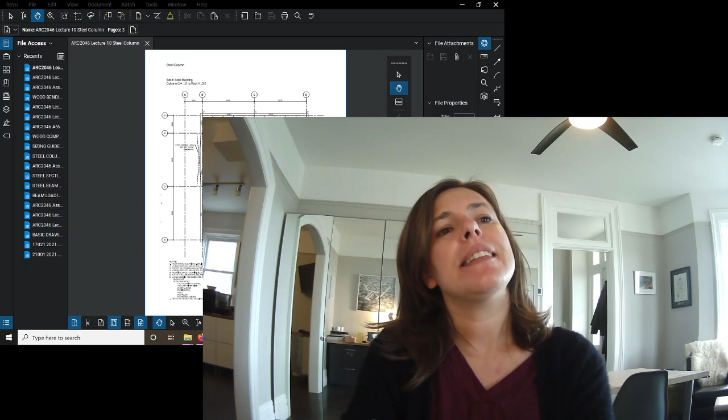So here we are, week 10. I'm going to go through a series of examples. I'll tell you, when I started planning this lecture out 2 days ago, I thought no big deal - I'll make up an example of each, a beam and column for wood, steel, and concrete.

I haven't done this lecture before. Up until 2 years ago, Structures 1 and Structures 2 were each only 10 3-hour lectures. In fact, when I started, they were 10 2.5-hour lectures. So the time has grown. And in the past, there's always been at least something that has made us miss a class.

So last year, COVID, there was a week it was just impossible to make things happen. The year before, I had strep throat for the 7th time in 6 months. And then the year before was when you got hit by the car, Dave, and I was pregnant and still had an 18-month-old.

So there's always been a reason one lecture has fallen off and we've only had 11. So one good thing about doing the asynchronous stuff is I have no excuses - I have to get all 12 done. There's no way we couldn't get another room, or they wouldn't give us the extension. Even though there's time you could extend, they would never give it to me.

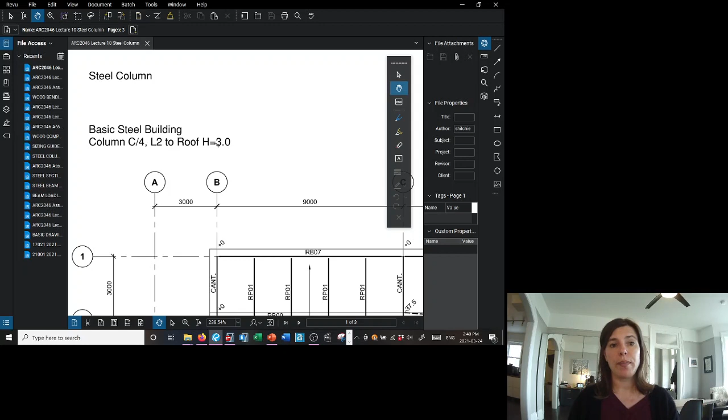So let's take a look here. We've got our steel column. This was our basic steel building, and we're going to look at column C4 from level 2 to roof. If you look at that full drawing set, you'll see the difference between level 2 and roof is 3 meters. So I'm only showing the roof here, but you could open that drawing set and see what that difference is. I think you guys can see this - it's not as great as I'd like, but it's a little bit bigger than a little dot.

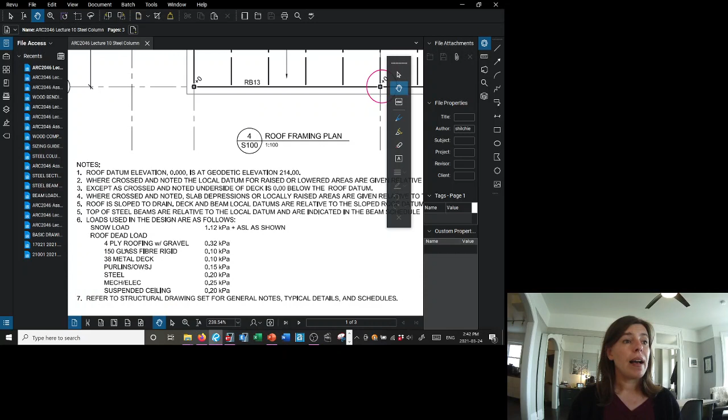If you remember, there's a column schedule listed with this as well. We have loads here, there's a snow load - they've already worked it out from SS and SR and showed us 1.12 kPa plus ASL as shown. There was no ASL shown, so it's 1.12. Then here's the dead loads. So everything we need to design this, we have.

Let's go to our next page here. If we were following our sizing guidelines, we'd take that height and divide it by our sizing guideline for steel columns - 3 meters divided by 20 tells us 150 millimeters. So for a preliminary drawing set, we'd probably want to draw an HSS that's 152 by 152 to leave us a buffer.

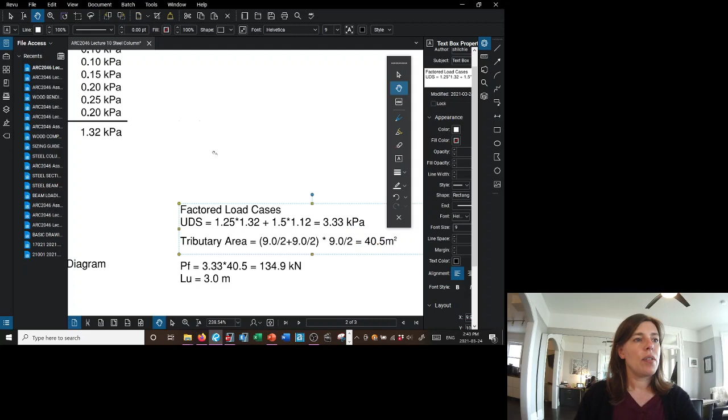Now, from what we learned in Structures 1, we know we can take these loads and figure out the UDS, which is the factored dead load and the factored snow load. We can look at our tributary area, which was roughly 1/4 of each of those bays. So we have a factored load of 3.33 kPa and a tributary area of 40.5 meters squared. Remember, I ignored the fact that the stairwell was there, so don't worry about that - I'm going with 1/4 of each of the bays. I can multiply my load times my area, and I get a factored load of 134.9 kilonewtons.

I know I have an unbraced length on my column of 3 meters, so it's always nice to draw yourself a little picture. Here's my free body diagram of my column. I've got PF, which the value is listed right here. I've got my dimensions, and I've got the reactions that make this stable. That is everything we learned in Structures 1. It seems a little sad when it's written down so quickly, doesn't it?

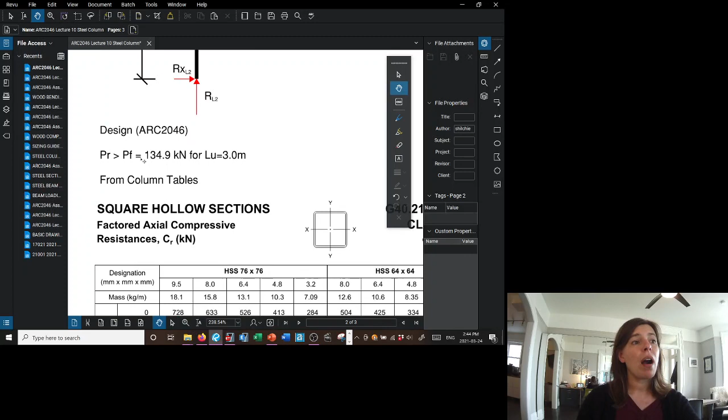Now we can look at what we've learned in Structures 2, which is actually designing it. We know if we have a table, we might as well use it - you guys have to do full calculations on the exam, we don't have to. But what we want is PR greater than PF. We know what PF is for this unbraced length, we've calculated it. If we look through all of the available options, we're going to go with a square HSS. No one's told us that, but let's just stick to a square HSS.

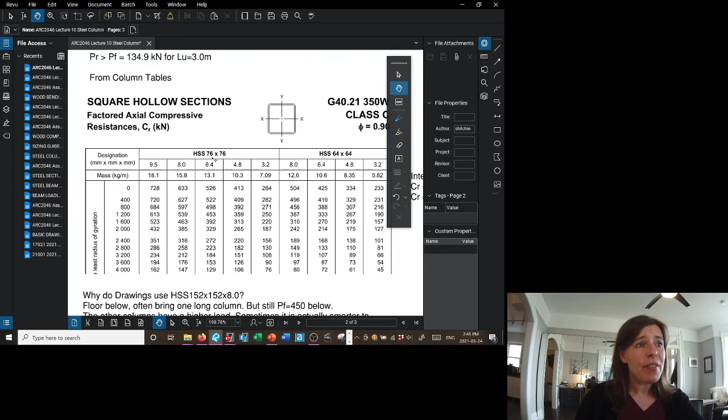We have an HSS 76 by 76, and all of these columns list at 2.8 meters and 3.2. We're at 3 exactly, so we want something that falls in between. It looks like we might not be able to work with a 3.2 wall thickness because we have basically 135. But an HSS 76 by 76 by 4.8 would fall in between 151 and 182 for our CR, and we want CR to be greater than PF. So we can interpolate here as a straight line value between these two things, for a 76 by 76 by 4.8 HSS, and we get that CR is 166.5 kilonewtons - that looks like it's greater than our PF.

Now I wonder - let me open these up right here. We're talking about column C4, right? So here's column C4, I have 150 kilonewtons written down here from level 2 to roof. Sometimes we'll just round up to something even, having a little buffer in there, no big deal.

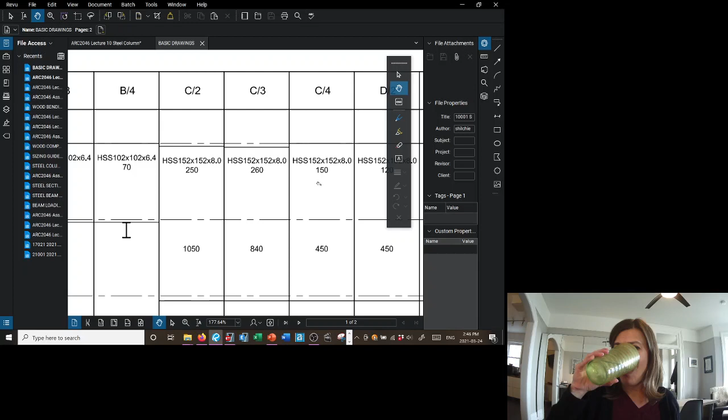We know that if it's critical, we can go back and refine it, and maybe that 135 kilonewtons gets us the exact column we want. But look, I have a 152 by 152 by 8. Why would I do that? A 76 by 76 by 4.8 works, and it worked comfortably. Why would I make a bigger member? Why would I do that?

Well, there's two reasons. Part one is that we have a second part to this column down here. Below, we have 450 kilonewtons on this. So you might still say, who cares? Make this part be a 152 by 152 by 8, but not this.

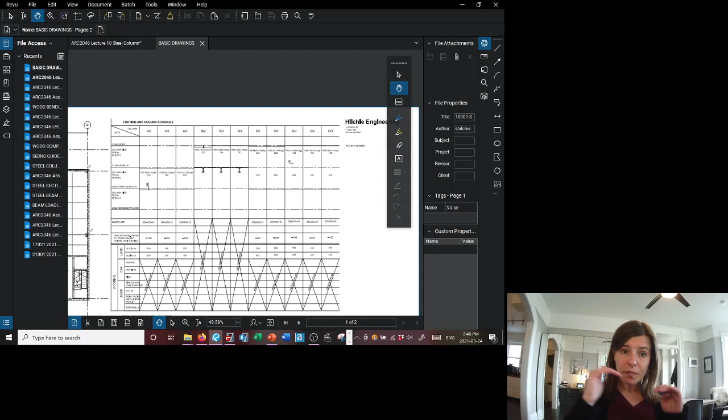I get it, this would be very annoying to you, but this is where understanding construction can actually come into play. Designing or structural analysis isn't the only component. We're going to go through the calculation for the 76 by 76 by 4.8 thoroughly, but the reason that's not what's on my drawings is because most of the time columns will come in at least a 2-story lift. Piece count can be a big part of cost, and sometimes they don't like to build one floor and then come back and put more columns on. Columns they might put in place and have them go more than 1 story, build in the second floor, and then put on the roof.

Not always, but for something like this, for 2 stories, they probably would do this. So I know that inevitably the contractor's going to come back and want to do that, so I'm just going to go with that. I know this is going to make it cheaper, it's going to make it easier for them to build, and that is part of my job as well. As much as I say size or cost is the be-all and end-all, and that's usually directly related to the weight, it's not the only thing. Ease of construction and piece count can come into play.

Oh my goodness, sorry guys. I've got an eyelash in my eye. I know, I got it. Oh, now I'm probably going to sneeze.

So in this case, I made a judgment call, and also we have 152 by 152 in most of the locations. Sometimes just having a standardized column can make things easier as well. So some of this is experience.

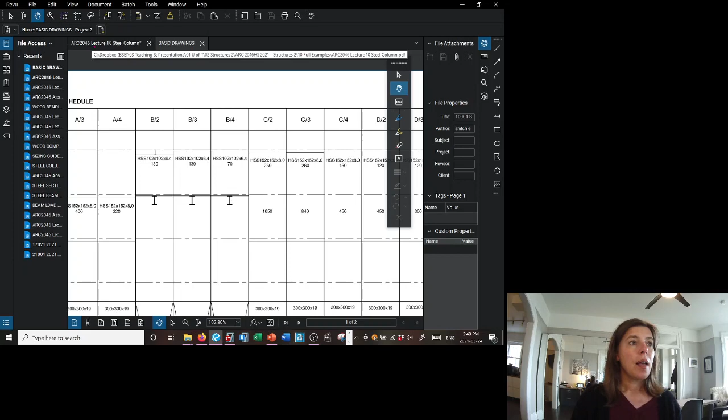But we're going to now do the calculations for the 76 by 76 by 4.8, just because that's the size, we want to verify that. So we're going to go through and do that calculation. I need to stop this, I can't get it out of my eye. Sorry about that, I think I've gotten it out of my eye now.

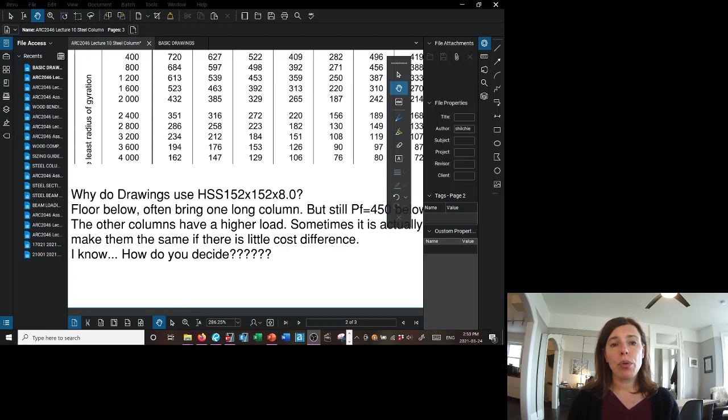Okay, so I get it. How do you decide? Well, that would be my job to help inform you of that as the architect, with me being the engineer. So we're going to go through and design the one that we just sized. Let's go to the third page where we go through the calculations for an HSS 76 by 76 by 4.8, that is 3 meters long.

We know everything we need to know about steel. We know the reduction factor for a steel column. We know that cold rolled steel is 350 MPa. We know E is 200,000 MPa and G is 77,000 MPa. We know that we can find the member properties. We can open the steel sections.

Eventually... that's weird, right, that it isn't showing up, right team? What's happening here? There we are. So we can go to the page that has the 76 by 76 by 4.8 on it. On that page, we can look up area, we can look up I. Now, is it IX or IY? One of the great things about a square section is it's the same in both directions. We're not talking about bending, so we don't care about S and Z so much, but we know we need R.

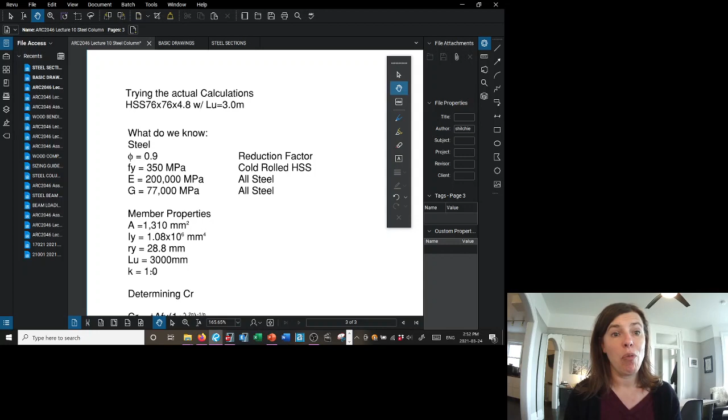So we can look up the shape properties that we need to go through our calculations. I've got that written here. I've looked up area, I've looked up IY or IX, it doesn't really matter, it's I, and R. We know the unbraced length, and we know K is all about what the end conditions are, or it helps modify the unbraced length, but I'm only giving you ones that have a K of 1. So now we can start determining what CR is. We know that the equation for CR is the reduction factor times a shape property, which in this case is area, times the strength of the steel, times some factor that talks about buckling. We know that that is lambda for us. We can go through and calculate lambda, and that's just plugging in the numbers that we have up above.

And then we can calculate CR. CR is 165,437 newtons, or 165.4 kilonewtons. And then we always like to write out, does our column work? Well, yes, we have CR of 165.4 greater than a CF of 134.9, and it works.

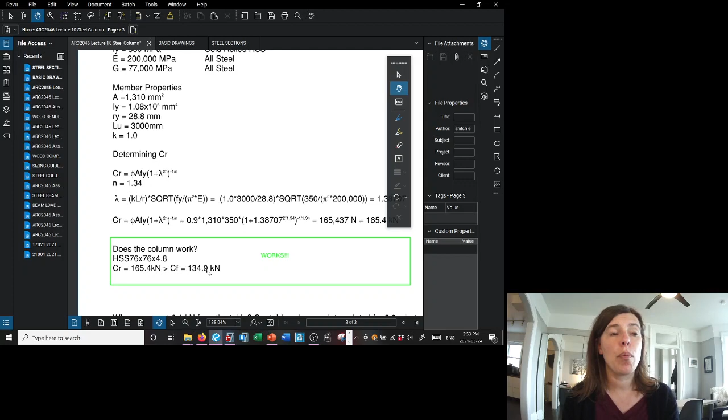Now there's a 0.1 kilonewton difference between our calculations and the table. Remember, on the table they calculated CR at 2.8 meters and 3.2 meters, and we interpolated between those 2 points when we did it based on the tables. It's going to be pretty close to the full calculated version for 3 meters tall, but now that we've gone through and done it in the refined calculated way, you can see it's almost exactly the same.

That wasn't so bad. We've done our first example now. So I'm going to save that. We'll keep our steel sections open, and let's open our steel beam example. Oh, didn't like that, did it? All right, let's open our steel beam example.

I can tell you it took a lot longer to make that. I can do these calculations very quickly, but I'm not normally trying to write it out and find examples that give you the best information I possibly can.

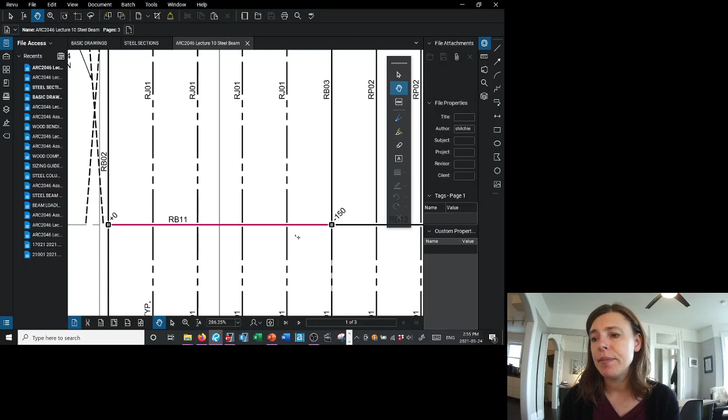All right, let's look at our beam now. So it's the same building, same roof plan, and we're going to design RB11. You can see here it spans from column to column. It's 9 meters long, and it's picking up the load from half of these joists and half of these joists. So its tributary width is going to be half of this 9 meters and half of this 9 meters.

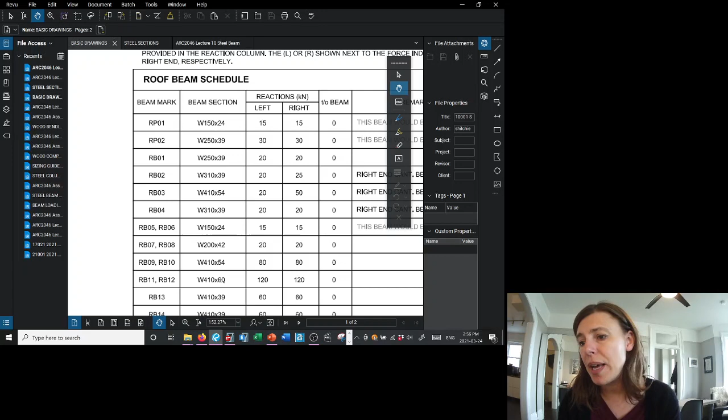Let's pop over to the beam schedule and see what it said I sized it as. So RB11, we had a beam schedule, and RB11 was sized as a W410 by 60. That was me using structural analysis software. Let's go through our work for this.

Well, let's start with our sizing guidelines. Our sizing guidelines for a steel beam - a steel beam is the type of bending element in steel that is usually doing the second hardest job. The easiest job is joists or purlins, which are usually just picking up deck at some regular spacing apart. But a steel beam is usually picking up joists or purlins, and that's exactly what we had. So the sizing guideline for a steel beam is L divided by 20. We have a beam that's 9 meters long, divided by 20, so we should have a depth that is at least 450 millimeters deep.

We know that the closest or the biggest available steel beam category after that is a W460. So on our preliminary drawings, we'd probably want to allow for a W460 beam on our drawing set.

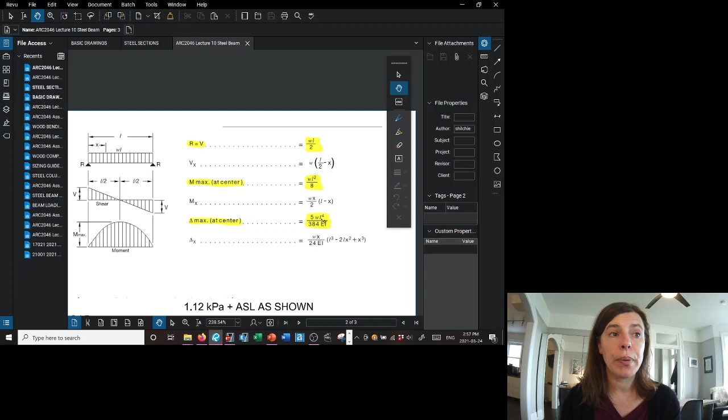Well, now let's move on to actually producing contract documents. What would we put in our drawings? We know that we have a uniformly distributed load on a simply supported beam. For that, our reaction equals our shear, which is W times L divided by 2. The moment is the peak at the center, and it's WL squared divided by 8. The deflection is max at the center, and it's 5 times W times L to the 4, divided by 384EI.

This is stuff we did in Structures 1, and you have these beam loading tables. We've already calculated our dead load, and we've calculated our worst case factored load, which was 3.33 kPa. We did that for the column that was going from L2 to roof. We can now figure out the tributary width. We know the tributary width was half of one bay plus half of the other bay, so 9 divided by 2 plus 9 divided by 2 equals 9.

That means our uniformly distributed line load on this simply supported beam is our load times our tributary width. So 3.33 times 9 meters equals 29.97 kilonewtons per meter. What we're saying is that every meter of that beam needs to be able to pick up almost 30 kilonewtons.

We also know that serviceability can be a pain, and we need to track a few other uniformly distributed loads. We need to worry about our serviceability dead and snow load case, and our serviceability snow all by itself. Normally we've calculated that separately, but we've seen consistently that the only difference is what importance factor is applied.

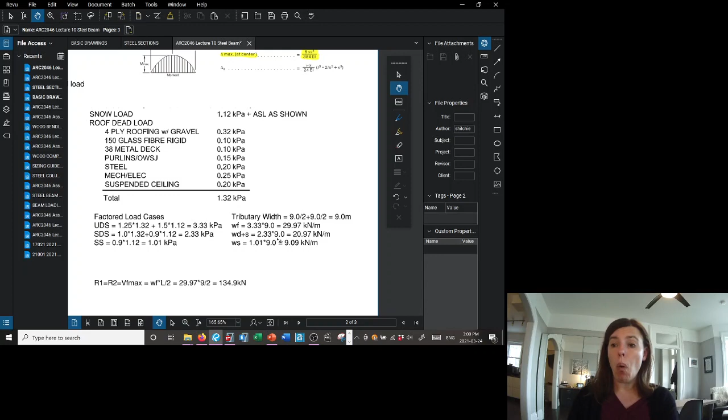So I'm just going to multiply that 1.12 by the importance factor right here. I've got 1 times the dead load plus the importance factor for serviceability times the snow load equals 2.33. And for the snow load serviceability case all by itself, it's 0.9 times 1.12, that importance factor for serviceability, times the snow load. That means I can calculate the uniformly distributed line load for dead and snow and for snow by itself, so I can calculate those here.

I'm going to draw myself a free body diagram. It's always good to draw a free body diagram. I've got my reactions for a simply supported beam, and I've got my line load. Here I've called it WF, and I've shown what this dimension is. That dimension is important — it lets us see at a glance kind of what scale of things we're talking about here.

Now, knowing my uniformly distributed line load and how long this beam is, I can start calculating my maximum shear, my maximum moment, and my maximum allowable deflections. We already saw that for a uniformly distributed line load on a simply supported beam, we multiply WF times L divided by 2, and we get 134.9 kilonewtons.

We can draw it here as our shear force diagram. Here's our bending moment diagram, and the worst case moment is WF times L squared divided by 8, or 303.4 kilonewton meters.

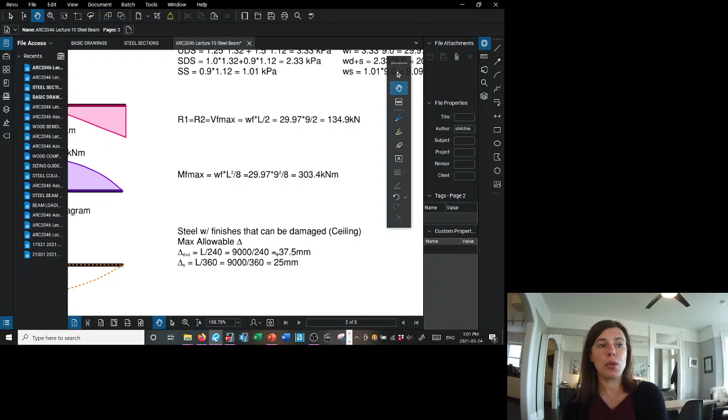And we know that steel with finishes that can be damaged, because it's a ceiling, has maximum allowable deflections. We have L divided by 240, or 9,000 divided by 240, giving us 37.5, and L divided by 360, or 9,000 divided by 360, for 25 millimeters.

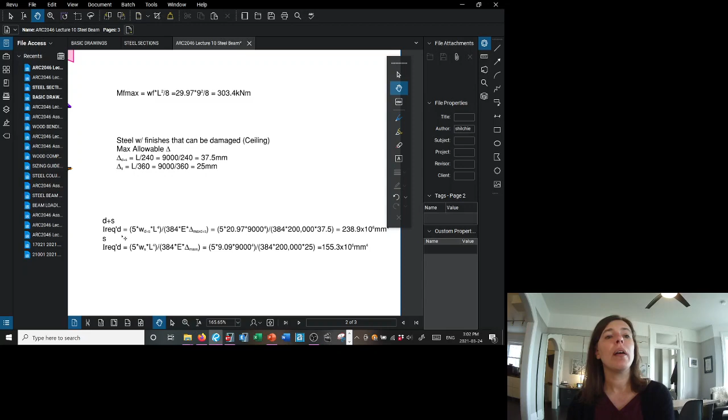We can calculate what I required we would need based on these deflections. This is something we learned this year — we can calculate the allowable deflection, or calculate the I required to make sure we don't exceed the allowable deflection, by rearranging this equation they gave us up here.

This is the delta max. Well, we know what delta max is — we can see that from our serviceability charts. We know what W is, we know what L is, and we know what E is. We could calculate what I required we need, or what we need to make sure our beam does not exceed these maximum allowable deflections.

So this is just that equation, 5 times the line load times L to the 4th, and L is in millimeters here — that's crucial. These are our serviceability loads, so I'm going to do this twice: once with dead and snow, and then with snow by itself. So these are the corresponding line loads, divided by 384 times 200,000 times the appropriate allowable deflection that corresponds with that.

This is our dead and snow allowable deflection with our dead and snow serviceability line load, and this is our snow line load with our snow maximum allowable deflection. We'll calculate two different I requireds, or minimum I's that we need. Now we can compare — we can see that this one is the biggest I, so we need an I, or moment of inertia, of at least this.

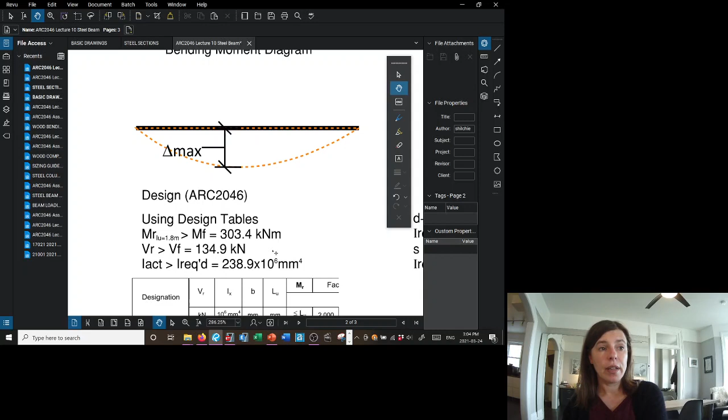I find it handy to write out myself a little chart. I'm saying that I need an MR greater than MF, and I know my MF is 303.4 kilonewton meters. I need a VR greater than VF, and I know that VF is 134.9 kilonewtons. I need an I actual greater than the I required, and the I required is 238.9 times 10 to the 6 millimeters to the 4th.

So let's go to the beam charts. Let's see what we can find. Let's open these charts and see what we get.

We know that they list the moments depending on what their unbraced length is. The distance between our joists was 1.8 meters — there's 5 spaces, 9 divided by 5 gives us 1.8 meters. So we need to make sure we're thinking about an unbraced length of 1.8 meters.

The I is listed here, the I actual of the beams, and VR. So let's go through and take a look. None of these seem to have an I high enough for what we need — I think we needed 238, right?

None of these work. Oh, here we've got a W460 by 60, with a VR of 746, and an I of 255 times 10 to the 6 millimeters to the 4th. Not all of it's written here, but they do show it right here. Let's take a look at what the MR is. They say that for everything with an unbraced length less than 1.97 meters, it's governed purely by strength — it's not about buckling at all. So we can use the easy MR that they have, and that is 397 kilonewton meters.

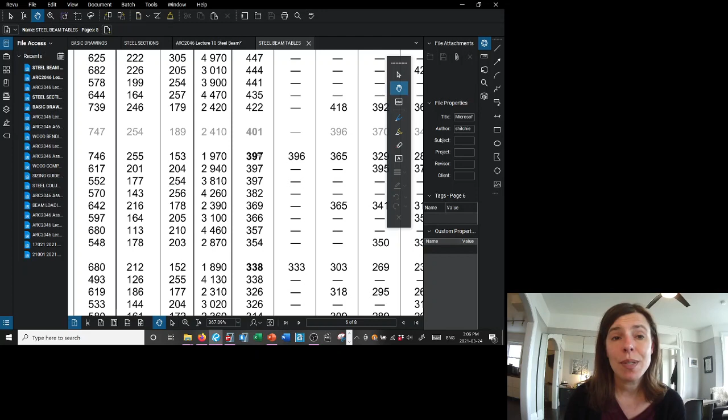So this one seems to work. Let's see if there's anything lighter. Well, this 410 has a shear, an eye, and a moment that works. But look at this, 67 is how many kilograms per meter it weighs. This one's only 60. That means this is actually heavier than this.

I'm not going to use this one. I'm not going to use the W460 by 61. They don't make those as much anymore. It's hard to find them and hard to source them. Some plants might still have them on hand, but we wouldn't start there. We wouldn't put that on the drawings, and if a plant asked, maybe we'd switch it out for it.

Everything else seems to be heavier, so even if it works, why would we use it? It doesn't seem like it would be a good idea or cost effective on our project. So I think a W460 by 60 is a really good choice. It meets our requirements. Let's go back and look at our steel beam.

So I've got that here, and it's highlighted that it works. Now, my drawings showed a W410 by 60, and we've just found that a W460 by 60 is what works.

Now, I used a design software to analyze this building. Might as well bring it over and show you guys what I used. So this is Etabs. This costs, depending on what version of the license you have, anywhere from $6,000 to $25,000 to purchase the license for this. I use this a lot. Etabs is kind of my go-to design software.

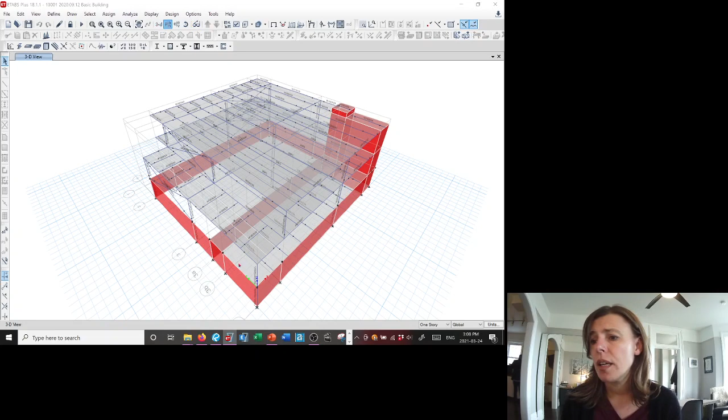And let's take a look. Roof. Well, here is our beam. In this, I've actually got a W460 by 60, but don't worry about that too much. Let's take a look at what this shows the shear diagram to look like.

Look at this. That doesn't look like our shear diagram, does it? It looks a little bit different. This has analyzed it as a series of point loads on it.

Some of you are going to want to do that for your project, for your beam. And I'm going to tell you, don't. It's more complicated, it takes more work, and it creates a very small difference, almost imperceptible cost-wise. Both beams on both versions of the drawings both weighed the same amount.

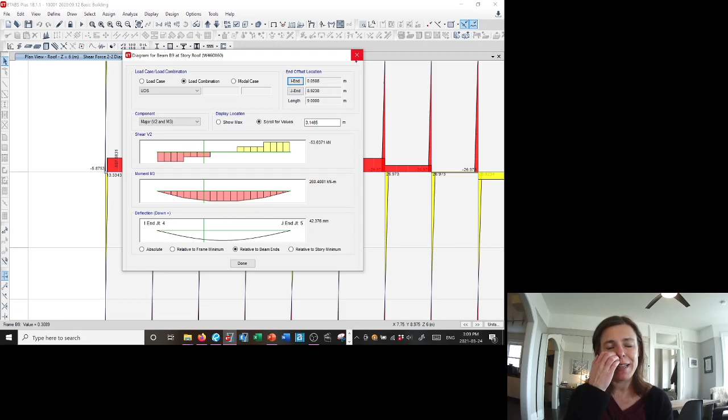We often, when we're doing this by hand, would treat it as a uniformly distributed load. I know, here's another one of those things where I'm telling you crazy things that don't match up with all the things we're doing every time. And that's, again, where industry standard and practice, and knowing what's going on again and again, is really handy. Most of these things used to be designed by hand back in the day. And when we did that, we would always do it treating it as a UDL.

For a computer program, it is absolutely no more work, so we'll often treat it as a series of point loads. I am trying to show you the hand calculation versions that I want to match with the old methods that we used to do, because that makes our life a little bit easier to calculate it, and it was literally how we used to do it.

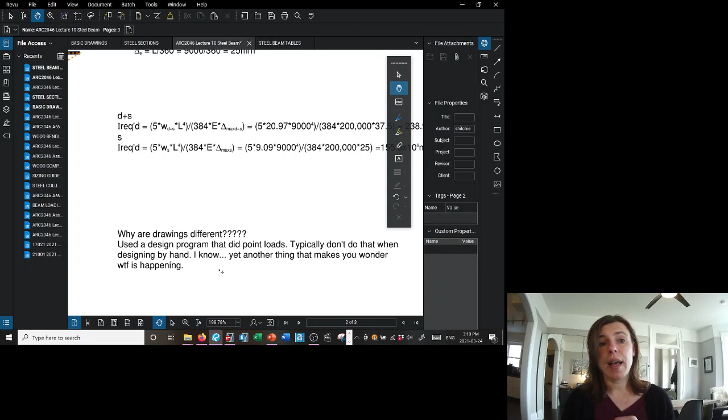So this is, again, one of those weird things that happens because I'm a pro at what I'm doing. You guys are going to do a uniformly distributed load on a simply supported beam. I don't think you do a truss in this version.

Well, let's now take our W460 by 60 and do it by hand. Let's calculate it out and see if we get these numbers for shear and moment.

All right, so let's start up here. We want to try the actual calculations for a W460 by 60 with an unbraced length of 1.8 meters. That's the distance between the joists. We know that for steel, the bending reduction factor is 0.9. The Fy for hot rolled steel is 345 MPa. E is 200,000 MPa. G is 77,000 MPa. That's pretty easy.

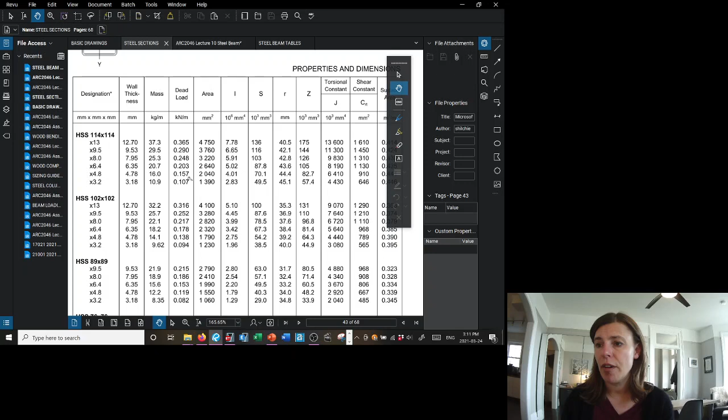We can look up the member properties. Let's go to our steel section here. Let's find our W460 by 60. All right, oh no, one more page. Oh, I went too far. All right, W460 by 60.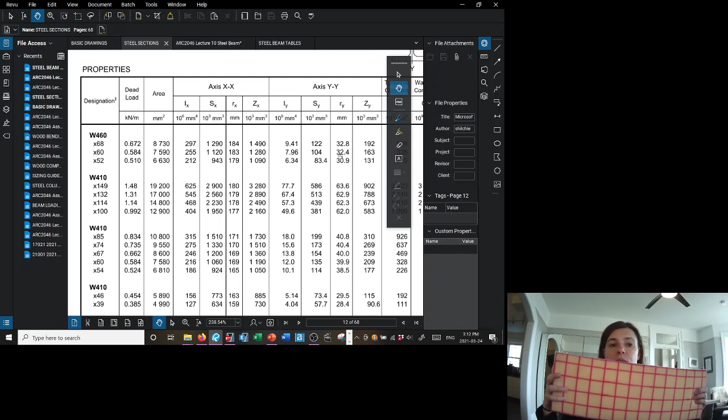We can look up all the things we need here. We can look up the area if we need it, IX, SX, ZX. We can look up IY. Remember that for a beam, for the strength part, we care about everything about the x-axis, but for anything that has to do with stiffness, like lateral torsional buckling of the top chord popping out sideways, we care about IY, or everything spinning about IY, using this axis.

So for stiffness, we're going to be using IY, but for stiffness of lateral torsional buckling, we'll be using IY. But for strength, we'll be using ZX, and for stiffness of the overall member in bending, we'll be using IX. We also have those big ridiculous numbers J and CW here.

So let's pull this up here. We know that it's a class 1 or class 2 section, which means we get to use the plastic analysis. If it was class 3, there'd be funny little symbols beside us letting us know, and then we'd just use the elastic properties. That just means we get to use Z instead of S for our bending strength.

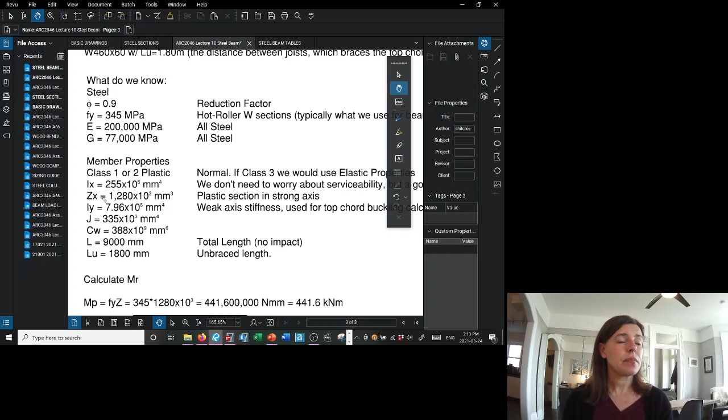So we were able to look up IX. We can look up ZX, IY for weak axis stiffness used for our top chord buckling, J, CW. We know that the overall length is 9 meters, but that the unbraced length is only 1.8 meters.

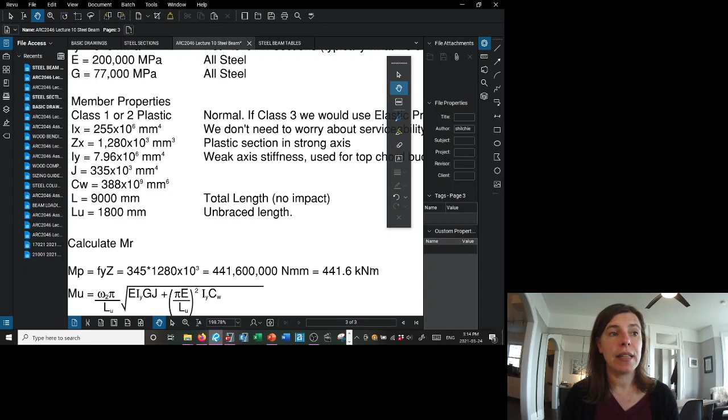So now we can go through this process of calculating MR. And MR has a few stages. First, we calculate what MP is based on whether it's just plastic or elastic bending. So this is just our shape property times Fy. So we have Fy of 345 times our shape property Zx, and we get that MP would be 441.6 kilonewton meters.

Then we need to calculate what is our buckling moment. At what moment would this want to buckle? So for that we have a big painful equation that looks like this, but we know that if we break it down and calculate this component and this component and this component, we can kind of start to keep track of things. So that's been done here in stages. You can go through and plug this into your calculator. And we get that MU equals 1,126 kilonewton meters. So the buckling moment is really, really high for this.

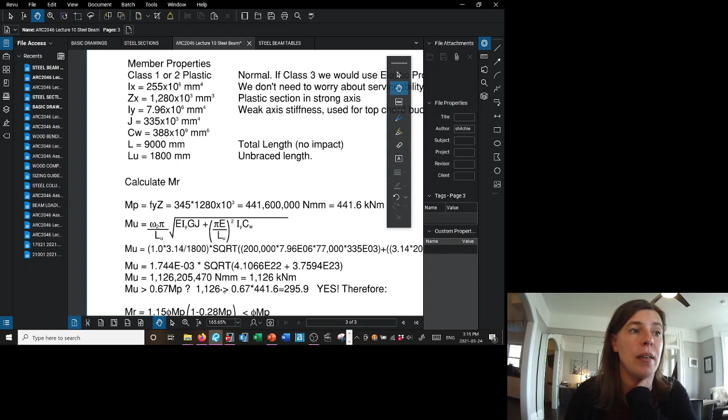So we want to see, is MU greater than about 2/3 of MP? It is. So that means our moment equation is this right here. 1.15 times our reduction factor times MP in brackets times what we know is very similar to our lambda factor in the columns. So basically what we're saying, but it has to be less than this value right here.

We wanted to know what is the strength alone value, what is buckling alone value, and then is this somewhere in between? If it's really short, it's just governed by strength. If it's really long, it's just governed by buckling. And if it's somewhere in between, it's governed by a combination of both.

So we can go through and calculate what it is when it's somewhere in between, and we get that it's 406.9. But look, 0.9 times just strength alone gives us 397.4. It looks like this member is governed by just strength alone.

Now that makes sense. Do you remember when we looked at the beam table, it said that for any beam less than 1.97 meters long, or an unbraced length less than that, the value didn't change. This is what MR was. That's because we were in the zone where strength alone governs. We didn't have to worry about buckling at all. Basically, it's so stocky that buckling isn't going to be the thing that governs. So now we have calculated our MR value.

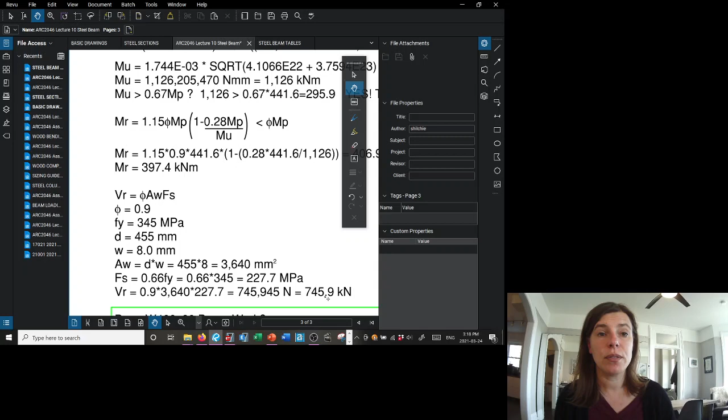So we can calculate the area of the web. We can calculate what 2/3 of FY is. And then we can plug that in and we can calculate VR, and we get 745,945, or 745.9 kilonewtons, which matches what they had listed in the tables.

So now a good thing to do is always write out for ourselves, does this beam work? We have a W460 by 60 beam. We have an MR for an unbraced length of 1.8 of 397.4 kilonewton meters, and that has to be greater than MF of 303.4. Seems to be correct. We have a VR of 745.9 kilonewtons, and it has to be greater than 134.9 kilonewtons.

Seems like it is. We have an I actual in the X direction of 255 times 10 to the 6 millimeters to the 4th, and it needs to be bigger than the I required, because this is the minimum we need.

We have to have at least this. Our I required is 238.9 times 10 to the 6th millimeters to the 4th. So it looks like our I actual is greater than our I required. So we've met all of the things we need to meet to say that yes, this steel beam works.

So now we have gone through our steel beam and our steel column. Let's move on to our wood elements.

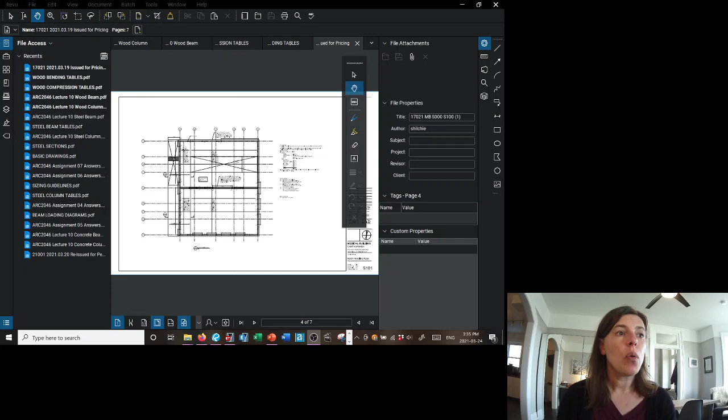Okay, let's take a look at our wood elements now. Let's take a look at a wood post and a wood beam. We don't have a wood project to take a look at, so I'm currently working on a project that's out for pricing right now, and we're going to take a look at that. You guys won't have access to these drawings, but I'll give you all of the relevant information you need.

This is a pretty basic construction building. It's wood frame with stud walls, wood floor. It's raised up, not on the ground, so it's got a raised floor with helical piers, walls, and then trusses for the roof. We're going to look at a post on this exterior wall and one of the lintels on this exterior wall.

So there are trusses that span from here to here. It's almost like it's two buildings side by side, because then there is another set of trusses from here to here. Just to give you a sense of it, I can show you what these trusses look like. So we're essentially going to design one of the posts here in this wall right here.

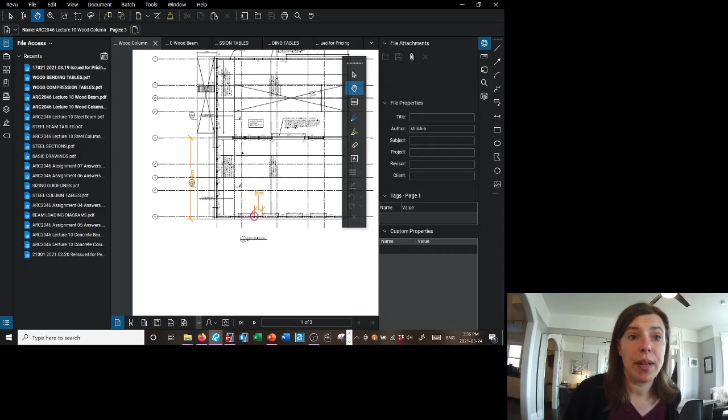So let's take a look at our wood column drawing. Here I've given you a small screen capture of the flooring plan, and I've told you what this dimension here is, and that's where the trusses above span between. So they come down on this wall, and they come down on this wall. We are going to be designing this post right here.

There's a beam coming down on it that is only 800 millimeters long, so very short. This is a post, and then in this wall there are studs every 16 inches. Remember, normal buildings have studs every 16 inches - that's just kind of how we build it, unless there's something else going on.

So this post is going to pick up half of this beam, and then half of the distance to the next post. So if it's 16 inches to the next post, it'll be 8 inches that it's picking up. So we could figure out what its tributary area is from that. We need to know what its loads are. Well, there's loads written right here. I then grabbed that and plopped it down in our analysis here.

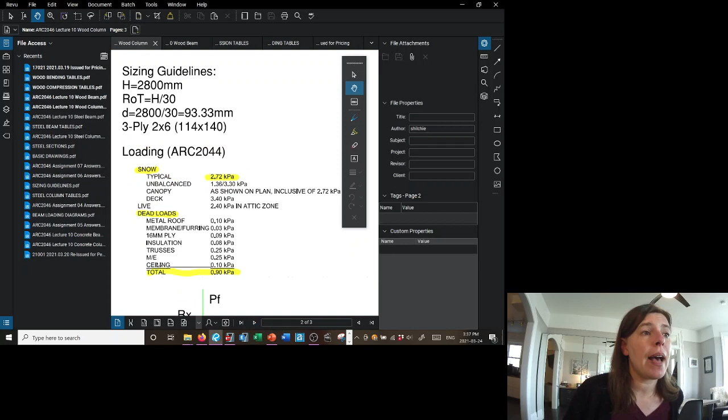So let's just start with the simple, easy stuff that we normally do. Let's do our sizing guidelines. You don't have it in the drawings, but I'm telling you that this post is 2.8 meters tall. Our sizing guideline for a wood post is H divided by 30, and we get that we need an element that is at least 93.3 millimeters deep.

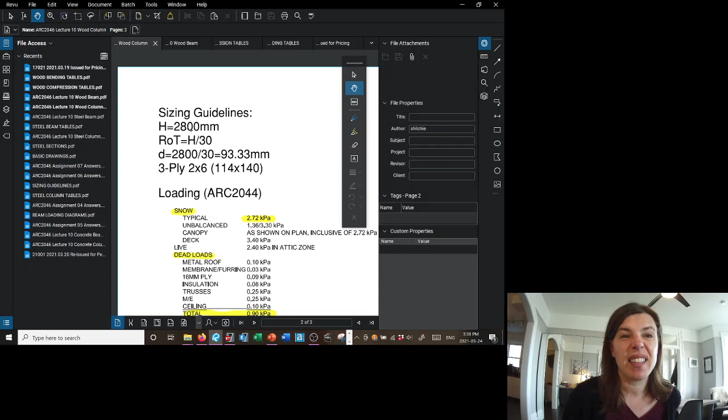Width, we know, varies between a half to a third of the depth, which means that we're going to end up with a 3-ply 2x6, or something that is 114 by 140. That seems like a pretty good place to start on this. So that would be our sizing guideline, what it gave us. We'd put that on our preliminary drawings.

So now let's take a look at what we would have done last term. Look at the snow load on this. There's all kinds of information they've given us here. There's live load in the attic zone - that's not applicable to what we're doing right now. There's a deck, there's a canopy, there's unbalanced loads, but we're not worried about that.

We're designing for 2.72 kPa of snow load. So somebody's already taken SS and SR and all of the factors that we need to apply and figured out what our snow load is. Somebody's already done the work that we learned to do last term. And then here is the roofing assembly - this has all been added up, and we end up with a total of 0.9 kPa for our dead load.

We know that we're going to want the factored dead and snow load. So we multiply our dead load by 1.25, and we multiply our snow load by 1.5, and we get 5.205 kPa.

Our tributary area is half of the span of the trusses, plus half of the span of our lintel, plus half of the span to the next stud. So our tributary area is 2.415 meters squared.

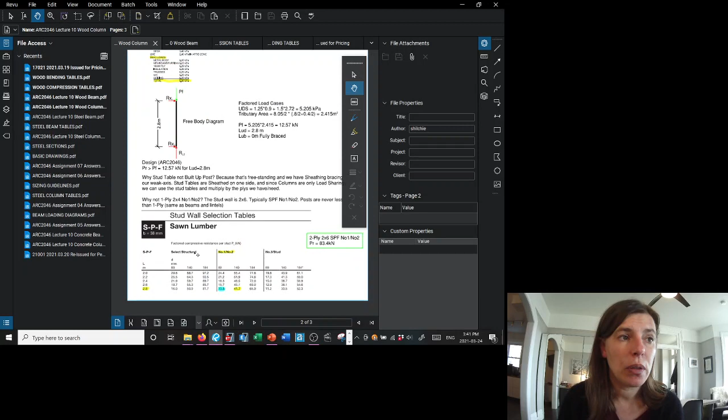Now we're going to go to the stud wall selection table to look up what value we need. Now you're probably thinking to yourself, why are you going to the stud wall selection table? Why wouldn't we go to the built-up post section? Because there is a built-up post section.

Again, here's one of those things that I am telling you because I know this. Because it's not freestanding, the post would be a freestanding element. We want something that's been braced by the sheathing in the weak axes, so the studs are designed for that. The stud tables are sheathed on one side, and since columns are only load sharing, we can use the stud table, but then multiply it by how many plies we have or need.

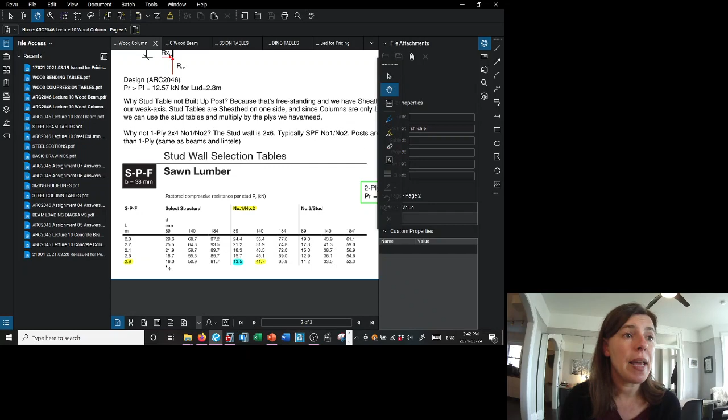All right, so let's take a look at our table here for SPF number 1, number 2, for a post that's 2.8 meters tall. We get that a 2x4 would work, a single 2x4 would work in fact. Then we actually could see that, so a single 2x4 works. Great. End of day, we can walk away from this.

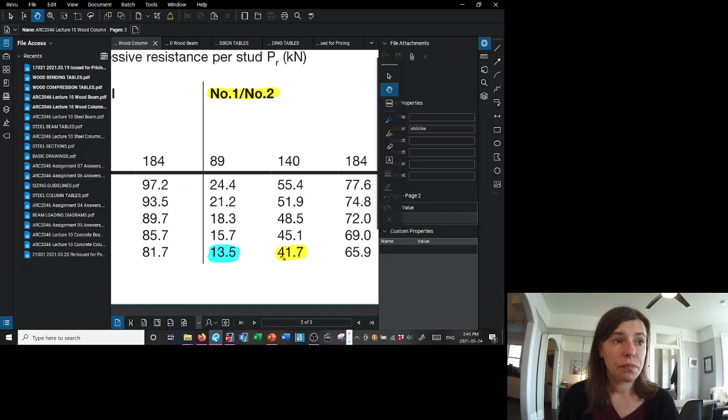So the way they actually build things is that they would make that post match whatever the stud thickness is. The studs have been designed by someone else on the project, and they have said that this stud wall system needs to be 2x6s. Okay, fair enough. We're going to make ours 2x6s then. So this is the 2x6 category. So a single 2x6 works. Done. End of story. Let's walk away.

Except if you look at the fine print about the design of these things, posts, we always make them 2-ply. It's the same way our beams, we always make them 2-ply. We don't go less than that. So this post, even though a single ply of 2x4 will work, we would make sure that it was a 2-ply 2x6. It's just what we'd do. It needs to match the depth of the wall, and we are always going to use 2 plies for it. Now, we now know that if things came up and it was difficult to build or there was odd things going on, we have some kind of space in our back pocket that we could make use of to refine this design if we needed to.

So this is for a single 2x6 stud. We've got 2 of them. So a 2-ply 2x6 SPF number 1, number 2 has a PR of 83.4 kilonewtons. So I've summed up here why we did 2-ply and why we did a 2x6. Let's use our 2-ply 2x6 SPF number 1, number 2 in our design.

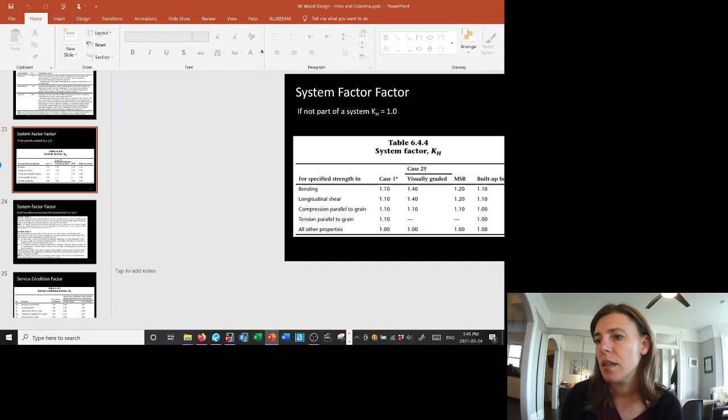We know that wood in compression has a reduction factor of 0.8. Oh, look what I have here, structural joists and planks. Let me go check and see that I did in fact update this. Yeah, so that's all right. Let's look at, I'm going to bring up these tables for you guys. I had first decided to do it as the 2x4, but then changed my mind. So let's take a look.

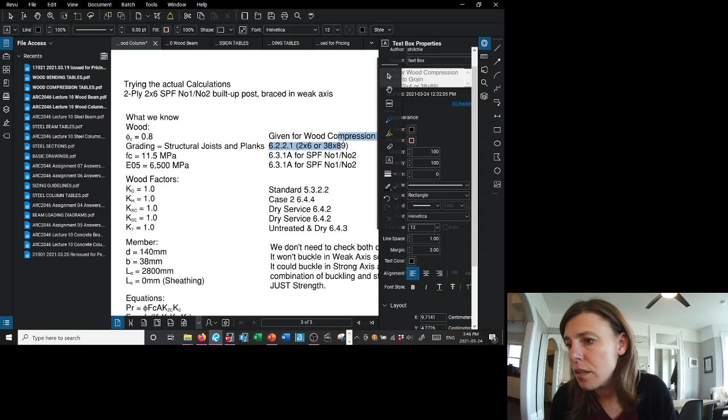2x6, right. So we have a smaller dimension of 38 and a larger dimension of 140. So structural joists and planks is correct. So I have this right, but this should just say 2x6 or 140.

All right, so we can pull off from our tables that FC, which is the compression value for structural joists and planks strength properties tables, we get FC of 11.5 MPa, and E05 is 6,500 MPa. That's on table A out of all of those tables. The wood factors, well, duration, it's standard. Case, it's case 2. Service condition, it's dry for both compression and buckling or stiffness, and it is untreated, so just a ream of 1s.

Normally, we check both weak and strong axis failure mechanisms, but we are fully braced in our weak axis. So it could fail by strength, but our strong axis could fail by the same strength calculation. So we only need to check the strong axis because it's the one that could possibly buckle.

We know our member is 38 by 140. We know that its height, in its tendency to buckle, which is the strong axis, is 2.8 meters tall, and its unbraced length for the weak axis is 0 because it's connected to the sheathing.

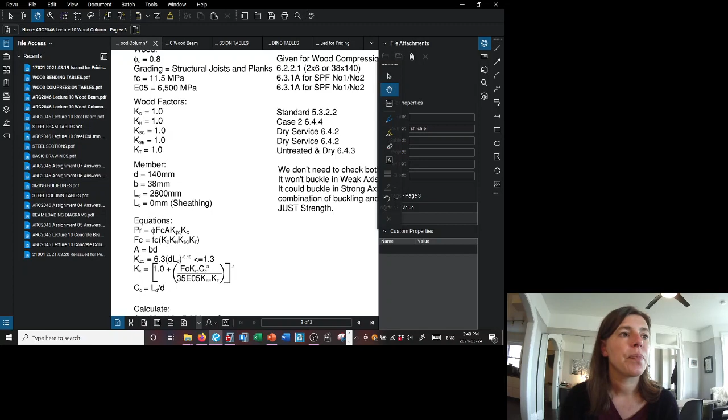The equations for wood columns are very similar to our steel one, where it's got a component for strength, a component for buckling, and then a component for a transition between those two governing failure mechanisms. So we calculate our reduction factor. We calculate a capital FC, which is really just taking the FC we looked up off the table and applying some of the wood factors. We have a size factor, and then we have our tendency to buckle factor.

We can start to break this down. We know our reduction factor is 0.8. Our capital FC is just our lowercase fc times our factors, so we can calculate that. We've got 11.5 MPa still. Our area is 38 by 140.

I have a 2-ply, so I've done it similar to how they did it in the tables, where I'm going to calculate 1 and then double it, simply because I'm going to match the tables as closely as possible that way.

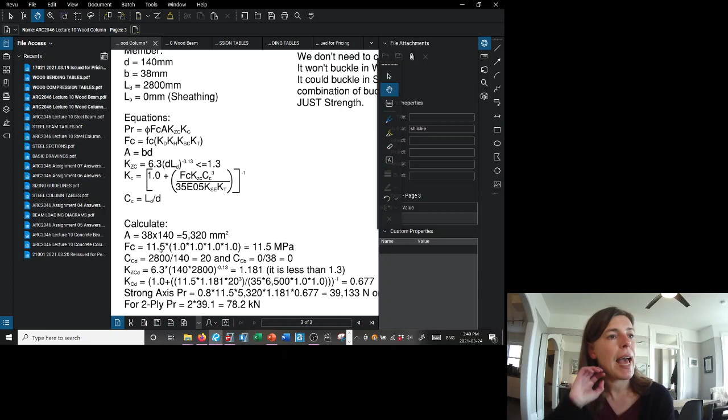I did just want to check one thing here, folks. My computer's being very slow, I apologize.

So we're going to calculate 1 ply at a time and then double it to get our 2 plies. We have our area is our width times our depth. We've calculated our capital FC.

We can calculate our CC, which is the ratio of length to dimension. In our strong axis, it's 20. In our weak axis, it's 0, because remember, our unbraced length is 0. Our size factor is 6.3 times our depth times our length to the minus 0.13, but it needs to be less than 1.3. We can calculate that out.

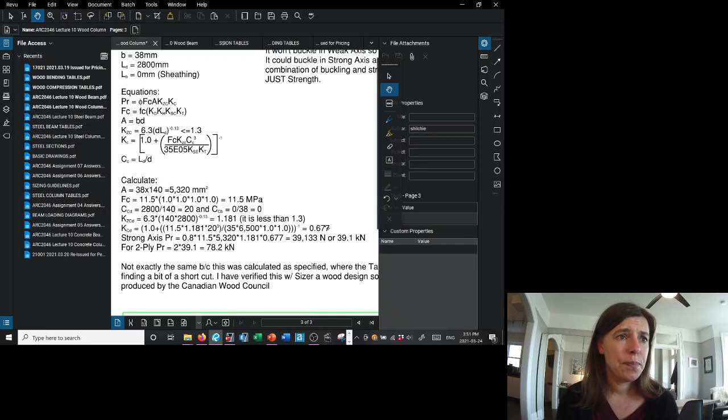And we can calculate 0.677. And then we can calculate the strong axis PR, or capacity of this member, by multiplying our reduction factor, by our strength, by our area, by our size factor, by our buckling factor. And we get 39.1 kilonewtons.

So that means that for a 2-ply PR, we've got 2 times 39.1, or 78.2 kilonewtons. It's not exactly the same as doubling the posts in the calculations for the stud tables. I haven't determined exactly why, but I do know that when I use the wood analysis software, it matches what I've calculated here by hand.

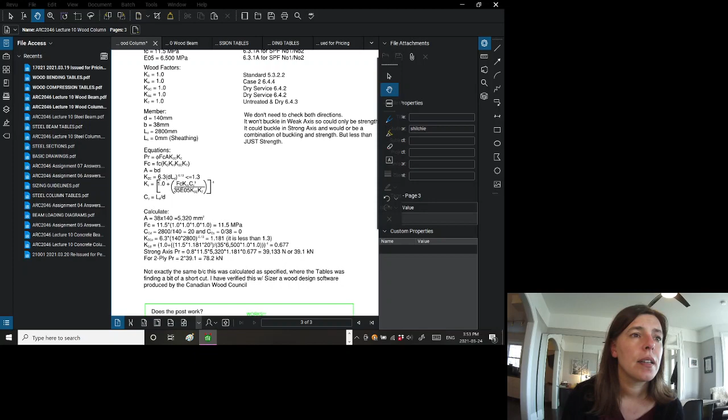For a 2-ply stud in a wall, this is what it determines. Let's open it up. Open up my column—sorry, I'll bring it over to your side in just a second. So here we have it's the height, that it's built up, what our dimensions are, that there's 2 plies of it, and that it's connected together nicely.

I wonder if that would make the change. Right, I know exactly what the difference is, why the stud is different. The stud is being treated like it's a stud with the elements adjacent to it. Would you take a stud in a wall that's a post as a system of case 1 or case 2?

Oh, I think it meets the definition, probably. But when I calculate it out, I still don't get the same answer it does. Oh, sorry, yeah, definitely would—a stud is a system case 1. No, but it's a post. The post in the wall that's replacing a stud.

Are you sheathing it? Are you applying sheathing in your Woodworks? Yeah. Because once it's a stud in a wall, it can only buckle in the strong direction. Yep, I know. But I'm getting Woodworks and I both get different answers from what's in the tables for a single stud, by itself.

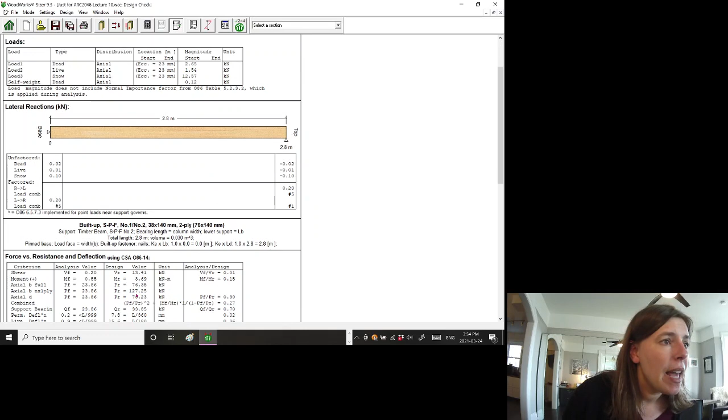So you can see that they also get the same value as us. So here it is here. Don't worry about that one, that's for the weak axis there. But here is our 78.23, which is what we calculated. And you did a 2-ply? Yeah, a 2-ply, which is what I get when I manually calculate it as well.

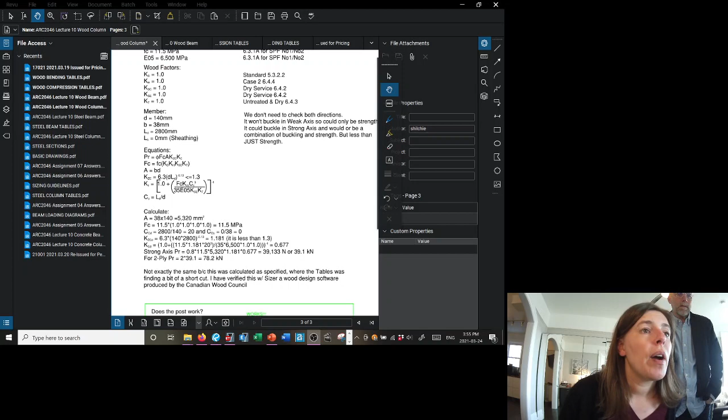Actually, yeah, 78.2. Whereas the tables, sneaky little tables, give us for a single ply 41.7, which would give for 2 of them 83.4.

So I thought, in theory, it's 5% or 6%. It's not a system factor. Exactly. So I thought, well, what if I multiplied it by the different system factors of 1.1 or possibly 1.4? Because we're going to see a built-up beam has its own system factor that we will apply to it. But it doesn't work out. If I take our 78.2 times 1.1, we get something much higher.

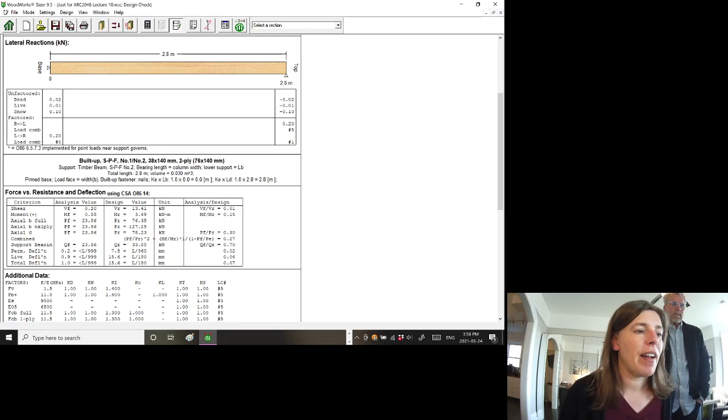So I can't quite correlate how they've gotten those two separate values, but I feel pleased that the software the Wood Council actually produces matches exactly our hand calculation. I wonder if there's a difference in the assumed eccentricity. There's a built-in assumed eccentricity of 1/6 of the member dimension.

But that would be in Sizer. Sizer matched my hand calculations. And did you put a? No. No, I did it as basic as could be. I did it as plain as you could imagine. Interesting.

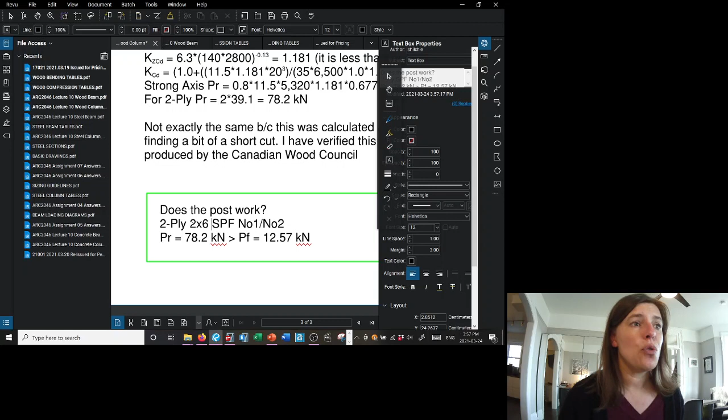So you can see that you can get small discrepancies in these things. What we want is to be pretty conservative about things, but look at our load. Look at the load we had in this. The reason I am not fussed about this at all, maybe I would be if we were getting different answers on our single 2x4 that we said could work. But we've got 2-ply, look at this, I didn't even write it in there, 2-ply, 2 plies of 2x6 SPF number 1, number 2.

So, does it work? PR needs to be greater than PF. We've got a PR of 78.2. This is the lesser of the two values, what we've calculated out. So I feel comfortable that we're using the conservative value. PF is only 12.57, so yeah, it seems over-designed, but the reason we're doing two 2x6s is because of the way we build the building.

So again, I'm trying to show you ones that we calculate out, but also trying to give you a little insight that other things come into play for these things, and knowing how things go together, which honestly can only come with experience. That's all I can say. Some of this really just has to come from experience.

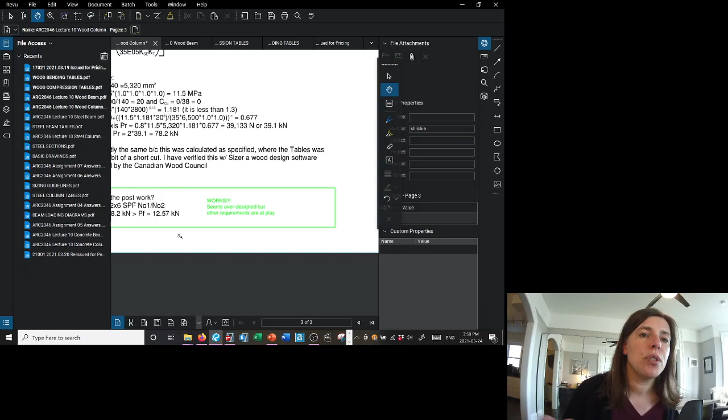I will give you questions. I haven't even given you ones as difficult as this, specifically so that you didn't have to go try to find what you were picking. I actually gave you things specifically to check for that reason, because you couldn't possibly know some of these things. I'm sure some of you have been builders and it's a little bit easier for you, but the rest of you couldn't know that because you don't have the experience. So that's why I usually try to give you an element that you're checking, the actual one you're checking.

Okay. Let's take a look at our wood beam example now.

So it's the same drawing set. We're going to do the lintel that frames onto that post. Now, a lintel is just a fancy name for a beam that goes above a window. So this goes in the wall above a window. Steel, we know we infill with other things, usually stud walls, and the windows kind of get attached to that.

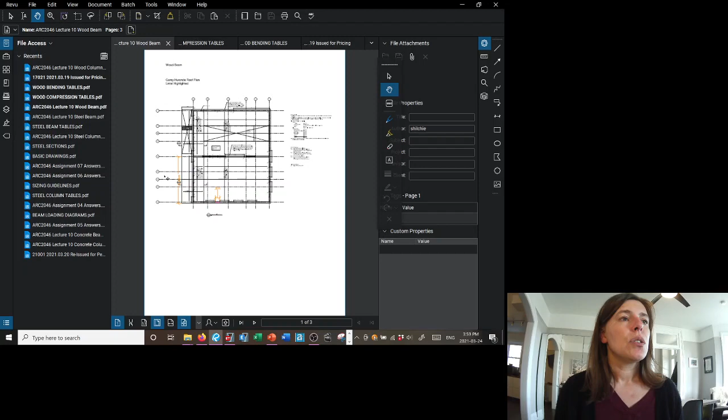But in a house, we have our roof and we have our floor, but our window is down here. So we'll put another small beam, or we'll put the only beam in the stud wall at the top of the window height. Sometimes they'll put them up higher depending on how they're building it, but most of the time they'll put it down in the height of the window. So we've got the span from here to here. We know what the length of the lintel is. So here's our lintel right here. It's only 800 millimeters wide.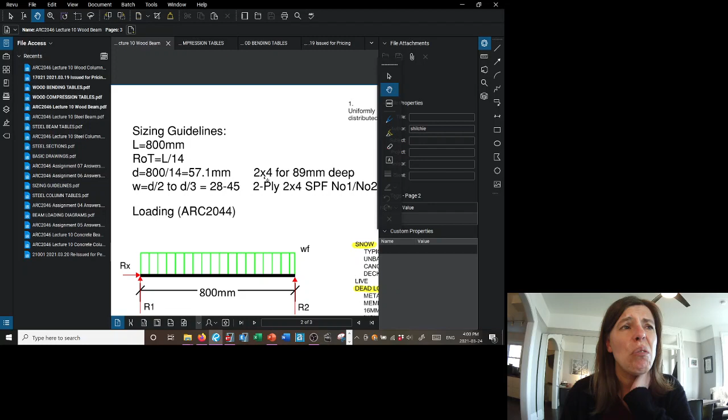Let's go to our second page. Very slowly. Let's take a look at our sizing guidelines. Rule of thumb says L divided by 14 for a wood beam. We're only 800 millimeters long. It's just the shortest, like it's about this big. So its depth needs to be at least 57 millimeters deep. So a 2x4 seems really good at 89 millimeters deep.

We know the width is somewhere between half to a third, or 28 to 45. So a 2-ply seems like it would be pretty conservative. Here's the thing, for lintels and beams, we always do a 2-ply anyway. We're always going to do a 2-ply for beams like this.

So we have a 2-ply, 2x4, SPF number 1, number 2. Why SPF number 1, number 2? Because that is the most ubiquitous lumber we use in the building industry for this scale of construction. Not mass timber, but if it's inside your building and it's not fancy and nobody's going to see it, it's SPF number 1, number 2. Just think of that as a given.

We have another uniformly distributed load on a simply supported beam, so those equations we did for the steel beam stay the same. We've already looked at our snow load and our dead load, and we've already figured out our factored dead and snow load was 5.205 kPa.

We know this is a beam, so we're going to want to look at serviceability as well, or our serviceability dead and snow live load and our serviceability snow load all by itself. For snow, that means we get to use the importance factor for serviceability, which is 90% of the total snow load, or 0.9. So our serviceability dead and snow load is 1 times 0.9 plus 0.9 times 2.72. Our snow load all by itself is 0.9 times 2.72.

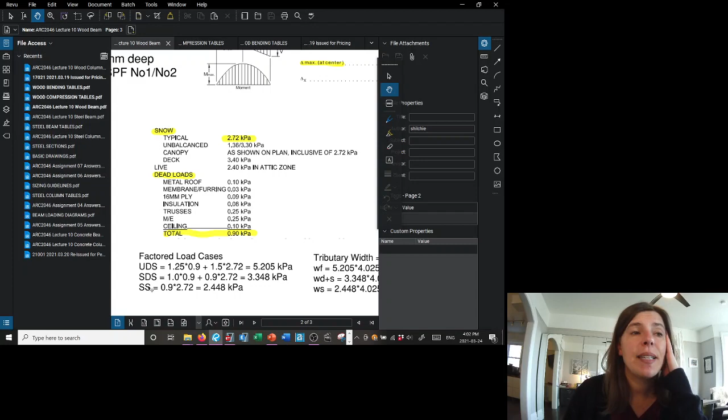We know that the length of those trusses was 8.05 meters long. This is picking up half of the roof. The other half of the truss is going to the other wall. So its tributary width is 4.025 meters. That means we can calculate our line loads, our uniformly distributed line loads, both our factored one, our serviceability dead and snow, and our serviceability snow.

So here are those calculated out, the loads multiplied by the tributary width to give us our line loads. Here is our free body diagram showing the dimension, the reactions, and the uniformly distributed line load. We know that for simply supported beams, we have pretty easy means of calculating the maximum shear and the maximum moment, and we know what the shear diagram and the bending diagram looks like. So here those are written out.

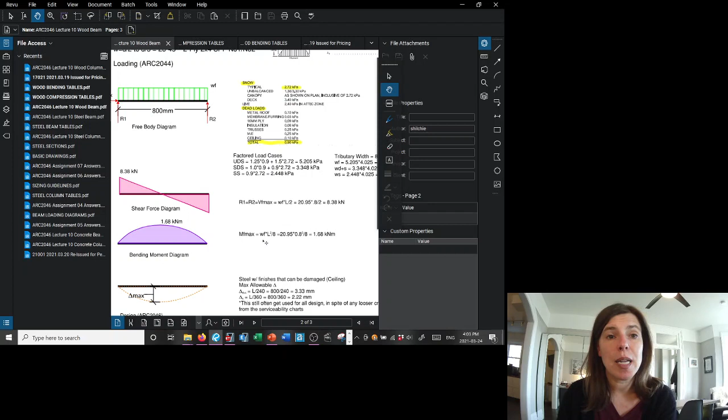We can calculate our maximum shear, and it's WF times the length divided by 2, or we end up with a shear of 8.38 kilonewtons. Our maximum moment is WF times L squared divided by 8, or we end up with a moment of 1.68 kilonewton meters. We can calculate our maximum allowable deflection.

Now look, I have used L divided by 240 and L divided by 360. These are not the exact same as what are listed in the serviceability charts. I would make sure I gave you what serviceability criteria to use, because I know it's not always clear, or else I'd be very explicit what one you were looking at. There would be no ambiguity. I would tell you if there was drywall in it, if it could be cracked, if it was a roof. I would be very, very, very explicit.

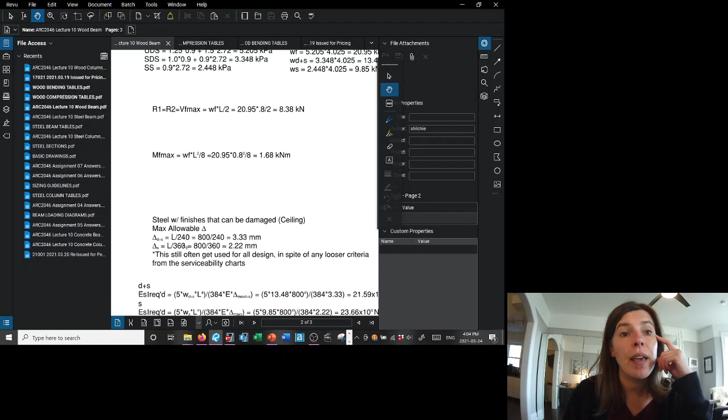But I am telling you that this is often what gets used. It doesn't matter what's in those charts, often people will, just without thinking, use 240 for dead and live or dead and snow, and 360 for live or snow. It's more conservative, these are the most conservative options. So a lot of the times, if there's no difficulty in designing this, or if there's no headroom constraints, and I don't think it's going to make a big price difference, which it wouldn't in this case, I would just probably still use the 240 and the 360. Again, I would be very explicit on what you have to do. I'm just telling you, I'm trying to show you what actually gets done in the calculations that people do.

Remember, in wood, we don't just calculate the I required simply because wood has so many different E values that we don't know what member or what type of lumber we're picking yet. We haven't really come down to that conclusion. We haven't picked out what design chart we need to use. So we figure out what EI we need, what the EI required is.

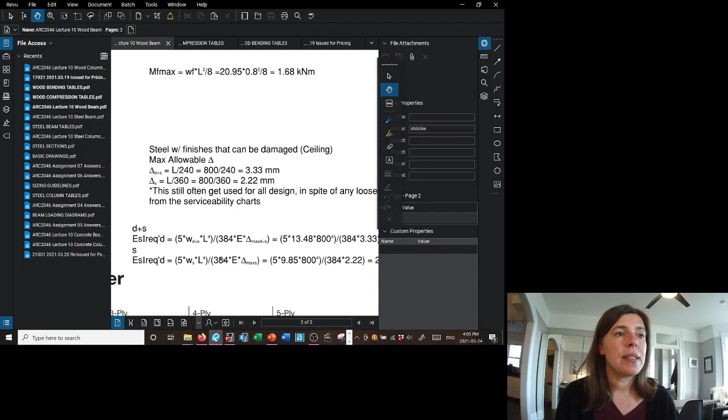So for dead and snow together, I'm using my deflection calculation equation and rearranging it to find EsI. So instead of ES being here and D being here, I've rearranged it, and we know what the allowable deflections are, we just calculated these right here. So I rearrange it and I solve it to find out what the ES I need is, so this is the minimum required EsI.

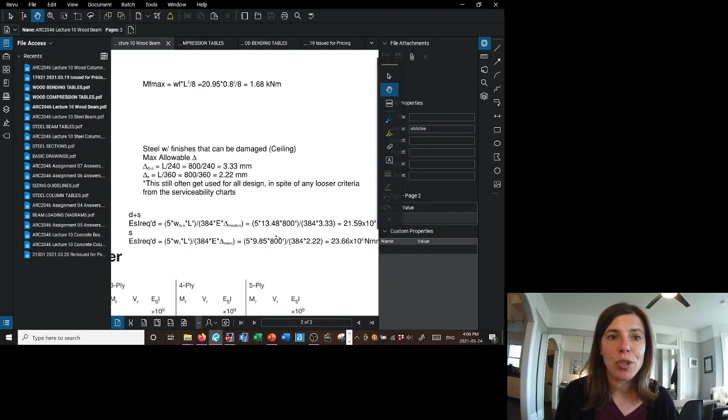Remember in our steel building, even though we were using 240 and 360, our dead and snow together was the governing case. Well, look at this one, the EsI required is governed by snow all by itself. So it really does depend on the loads and the criteria that change. I used the 360, but if I used the 300, this would go down, and maybe then this one would govern. If the snow loads were different, it wouldn't be clear which one governed. So that's why we actually have to go through and calculate out both. But now I have an MF, a VF, and an EsI required.

This is the minimum of what I need. Let's go to the sawn lumber built-up beam tables. We have SPF.

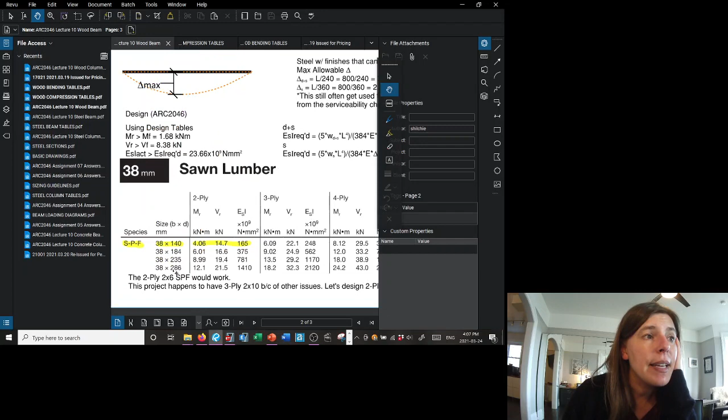2x6, and then look here, they have 2-ply, 3-ply, 4-ply, 5-ply. This is the number 1, number 2 category. I've clipped it off there, but let's pull it up here.

So here's the chart I'm looking at, with the select structural grade, number 1, number 2 grades. So we're down here using this. You can see 4.06 - this is what I've cut out here. It's the number 1, number 2 grades for SPF of a 2x6.

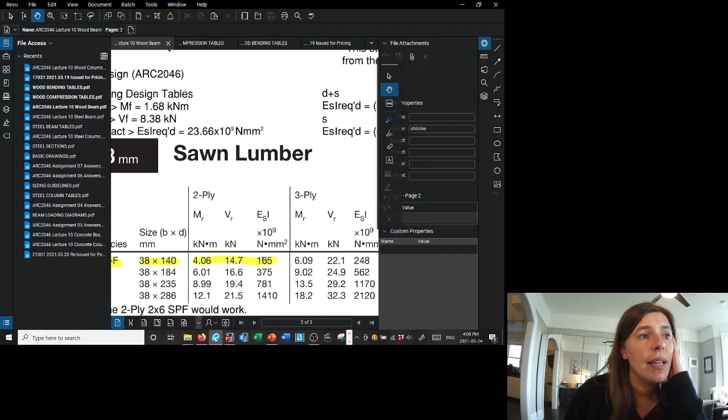Let's come back to our wood beam. We have a 2-ply beam, which is, remember, we need at least a 2-ply. It has an MR of 4.06, a VR of 14.7, and an ESI of 165 times 10 to the 9 Newton millimeters squared. Well, let's take a look.

4.06 is greater than 1.68, 14.7 is greater than 8.38, and 165 is greater than 24, roughly. So it looks like a 2-ply 2x6 is a really good choice here.

Now, I'm going to tell you that this project happens to have a 3-ply 2x10 in it, but that's just because of how they're building it, what's going together. There's other lintels, and now they're all just standardized, or they all have the exact same lintel. But we're going to design the 2-ply 2x6 SPF, so we're not going to do what's on the drawings. We're going to design - we're going to try to match these calculations right here.

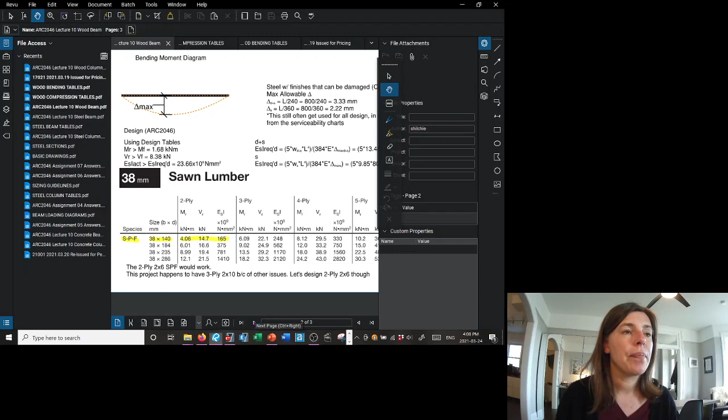So let's go to the third page. We want to do the actual calculations for a 2-ply 2x6 SPF number 1, number 2 that spans 800 millimeters. We have our depth, we have our width is 38 millimeters, but there's 2 of them. Our net area is the whole section.

Or 10,640. S is BD squared divided by 6, and I is BD cubed divided by 12. So those are all 3 different shape properties we make use of.

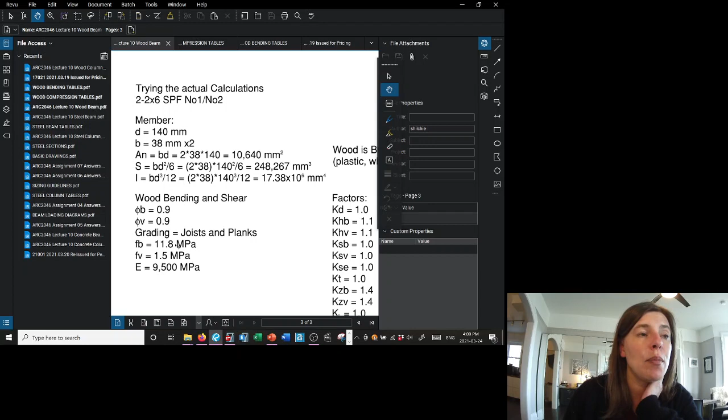Wood bending and shear. We know that the reduction factors are 0.9. This is joist and plank grade section, so we can look up FB and FV and our E.

Our factors - I had forgotten this, that built up beams have a system factor of 1.1. Let's take a look at this right here.

Let's go down and look at system factors. So system factors, there was case 1 and case 2, which we talked a lot about, and machine rated lumber, which we don't use. But then over here, look at this, built up beams. So we have a built up beam, and for bending and longitudinal shear, 1.1 is our system factor that we can apply.

So that's great, we get to increase the strength of our member a little bit. So our system factor for both bending and shear is 1.1. Our service factor is 1. Our treatment factor is 1.

Our KZB and our KZV - remember, that was also from a chart. Let's bring this up again. KZ.

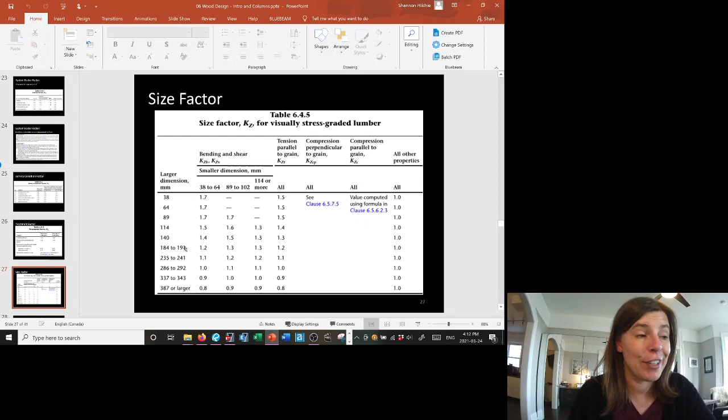Let's bring up this again. So we've now got our KZB and our KZV. The calculations for shear and moment are a little bit easier. Remember, buckling is rarely a concern because it's usually attached to a bunch of things.

In this case, we're attached to some stud above, maybe we're up tight to the top, there's sheathing on the side. It's going to be hard to make this thing buckle in its weak axis.

We have our reduction factor, our bending strength, with all of the factors in on it. So 11.8 times our 1.1. Then we have our shape property, which we calculated further up there, and we have our size factor of 1.4. So we can calculate that we have an MR of 4.06 kilonewton meters, which is exactly what we saw in the chart.

Shear is very similar to what it was for steel, and similar to the general thought process. We have a reduction factor, our strength value times a shape property, and any other factors. Our strength is FV times all of these wood factors, which for us is really just 1.1. And then the odd thing with shear is we're taking 2/3 of the area, or 2/3 of that stress distribution.

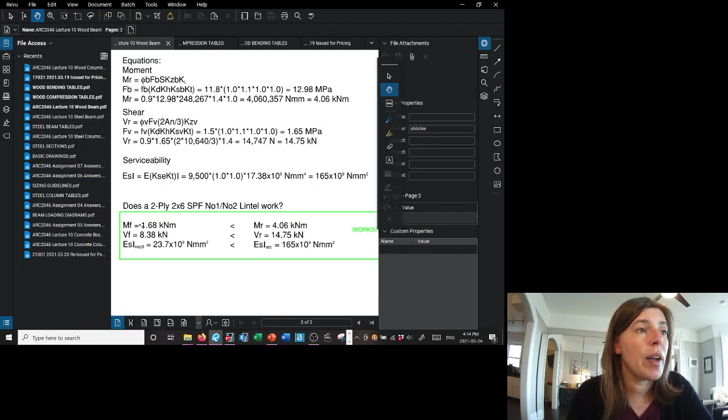So now we write out for ourselves: does a 2-ply 2x6 SPF number 1, number 2 lintel work? Well, MR is greater than MF, VR is greater than VF, and the ESI actual is greater than the EIS or ESI required. So this is a member that works.

So we've gone through a few different examples now. I was struggling on whether I would also do concrete beam examples for you. And I've been thinking about it because, as you saw even with these, all of these examples I've ever given you are simplified. Some of you are hungry for more complex ones, but that's not fair for kind of unifying things across the class.

The simplifications that I would have to make in the concrete ones would be a lot more. We've seen now that concrete beams actually do tend to have moment connections at the end, and so the actual stiffness of them is important. The design process for designing concrete beams, for finding MF and VF, is very, very complex. I don't think it's going to add anything to the course to go through that.

That said, keeping that in mind, the examples we did last week for the columns and beams in concrete were pretty simple. I don't think you guys would need to go much further on that. So with that in mind, I think we're done. We're done the hard stuff. You guys have all the examples you could possibly need to ace my course.